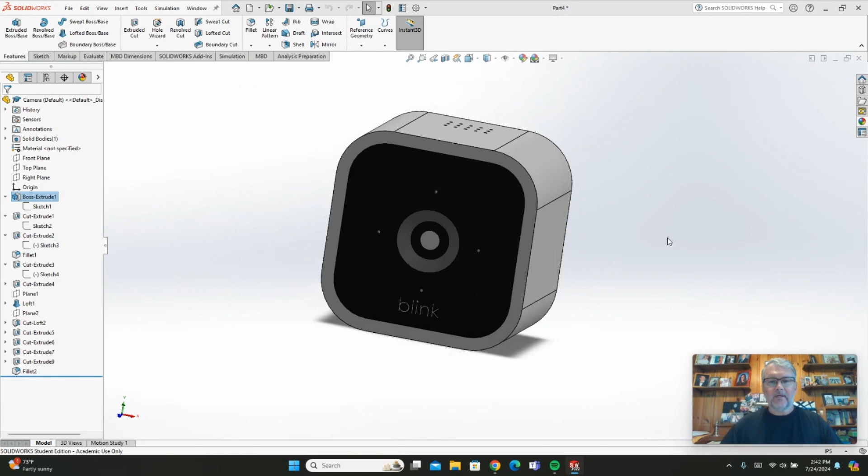I'm going to go up and say new, pick part, hit OK. If you remember in the last video when I did the base, I picked the front plane. I'm going to do that again here, since my base was this way, kind of looking straight on, and I'm going to do the same thing with the camera. I want to look straight onto the camera. The other thing I'm going to do is make my origin the very center of that camera, where that circle was in the very middle, where the actual camera is.

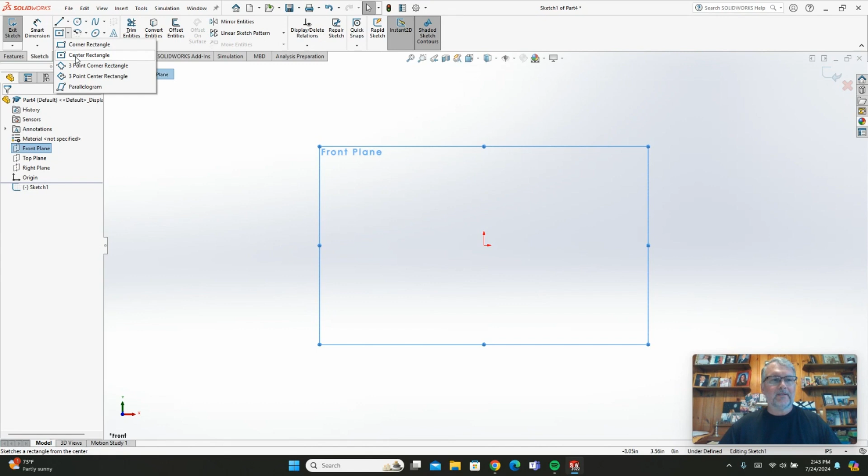So we did have a square camera, so I'm going to hit the rectangle command, and I'm just going to throw a rectangle up here. Then I'm going to go back and dimension it. I just happen to know that it's 2 inches by 2 inches.

Let me get out of this. I also know that it is, I believe, 1.25 deep.

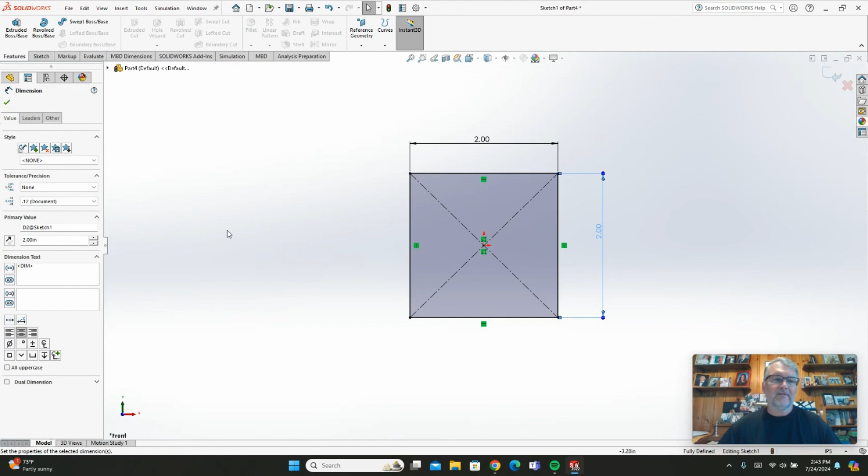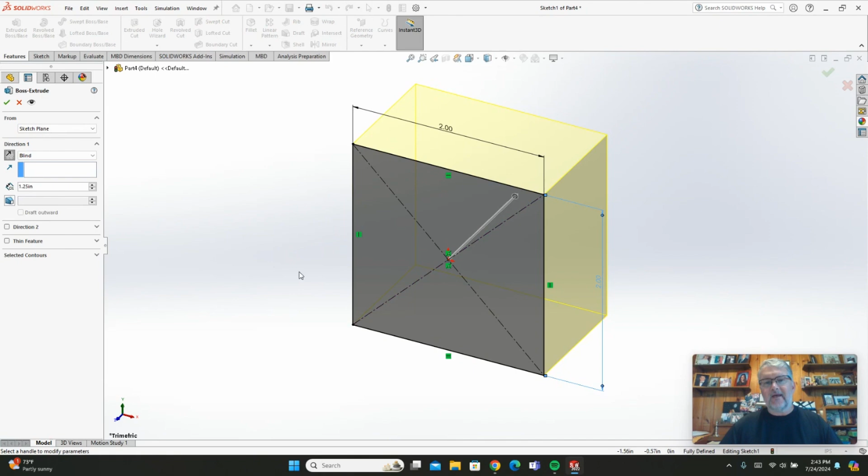So I'm going to go to Features and Extrude. Look at how it started to extrude toward me. I want it to extrude back because I want that origin on my front face, not on the back. So I'm going to change it to 1.25. If that's wrong, I can go back and change it, and then I want to reverse it. This is the button right here, you click, and it throws it back. Now you can see my origin is on that front plane, and that's where I want it. I'm going to hit OK.

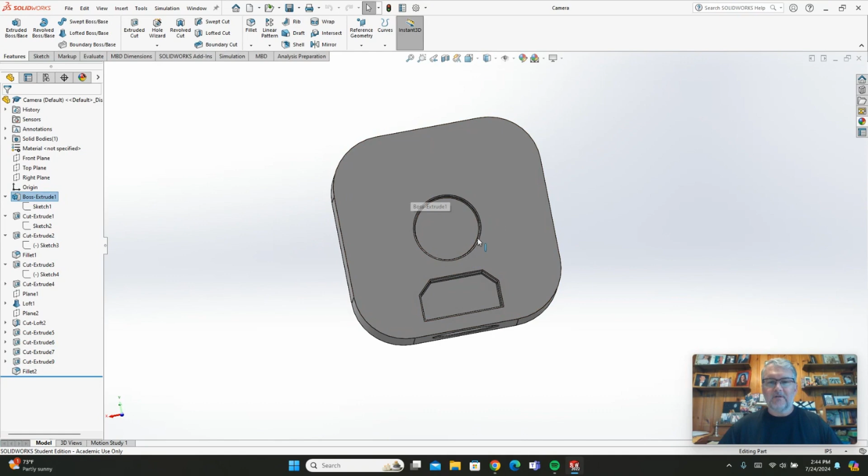So there's my basic block, right? That's kind of what it looks like. Now, if I go back, I'm going to keep referring back to this so you can see what we're doing. On the back of it, I have a circle here, which is a snap for the base if I want to use that. I have one on the bottom, and then I also have this cutout, which is where the plug goes.

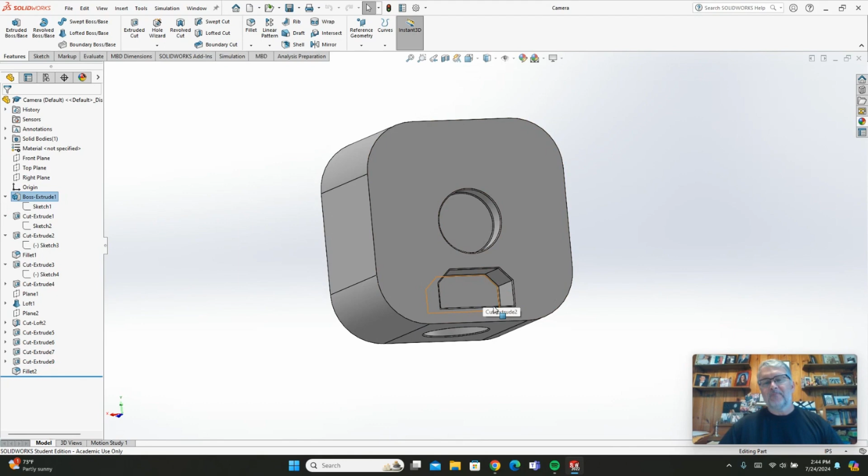Now, I could get into a lot more detail here, but I didn't. I just did a basic plug. You can't even see where the little USB thing goes. We don't need that, not for this video. We don't need that much detail. But what I'm going to do is create these three shapes and those radii on the side.

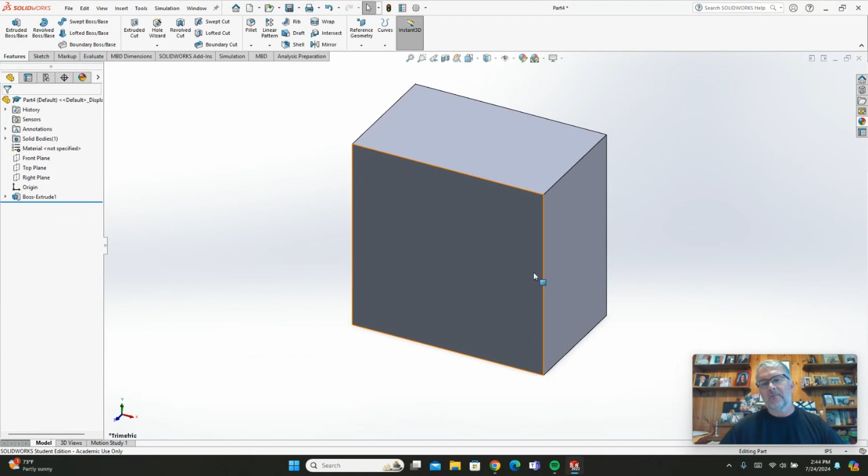So I'm going to go back. The nice thing is, if you have more than one drawing open, you can just go over your icon and click on the one you want. So I know this is my front face, so I'm going to go to the back face. I'm going to click on it, and I'm going to click Sketch. I know that hole happens to be right in the middle, so I'm just going to pick Circle.

I happen to know that it's a 5/8 diameter, so I'm just going to go 0.625. What you can also do, if you know the fractional, 0.625 is 5/8. So if I just go 5/8, the fractional piece, it's the same thing. If you don't know the decimal equivalent of a fraction, you can just use the fraction. That's kind of a neat feature.

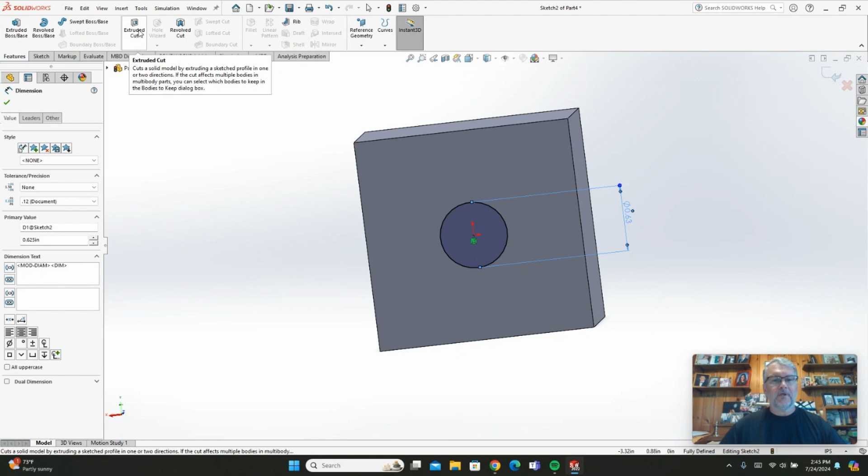Now I'm going to do a quick extrusion of that, but instead of doing an extrude boss, I'm going to do an extrude cut because I'm cutting that piece out. It puts 1.25 in there because that was the last one that we used. I happen to know that it's actually 1/8 or 0.125. It shows me what it will be. I'm going to hit OK, and there's my cutout.

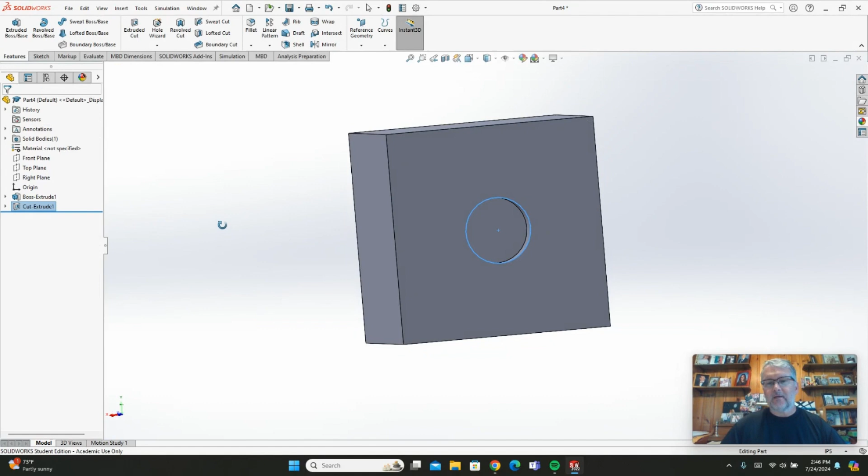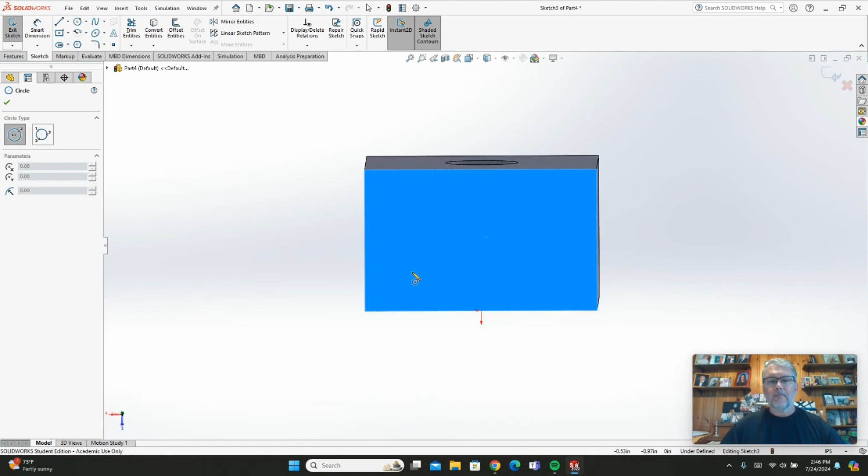Fairly easy. I'm going to do that bottom one too. Again, I can just go Sketch. Now this one's a little bit trickier because I know that my center point is right here because that's my origin. So I can pick my circle, and I'm going to square that up a bit. I'm going to pick my circle. I think I already did. You can see the circle tool, and when I go up, you see that dotted line.

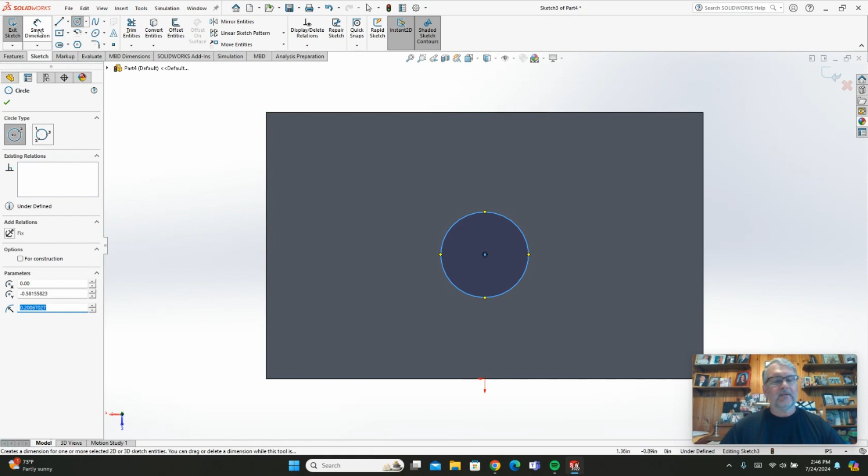Now, it doesn't really tell me where the center piece is, but it doesn't matter. I'm just going to put it here. I know I'm in the center this way, and I'm going to dimension it. It is the same dimension, it's 5/8, 0.625. And I'm also going to throw another dimension. I want it right in the middle from there to there.

If that's 1.25, I can go half of 1.25, which is 0.625. And that will put it in the middle of that block. I've already lined it up with this. I could put a dimension here too, just to make sure, but I'm not going to worry about that for right now. I'm going to go to Features and do another extruded cut.

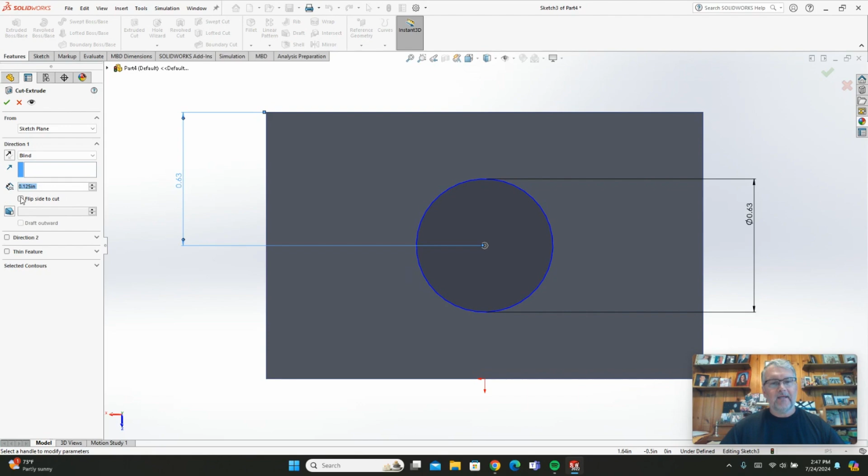It keeps the same value that I had in there before. I'm going to turn that sideways. You can kind of see it. I'm going to hit OK, and there's my second one. Okay, so there's those two.

Now I have the cut. I'm going to line this up. I have the cut that's going to go right here. All right, that cut I know has a certain shape. I'm just going to put that shape in, but I'm going to do it a little bit differently.

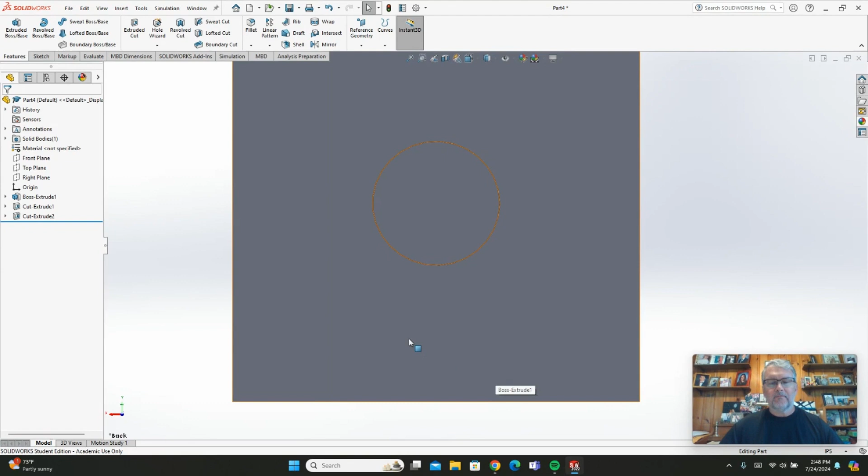What I'm going to do is pick this surface, which is what I'm going to sketch on. Now notice I could go up to the top and pick Sketch, but I'm also given the option here that says Edit Sketch. This should be New Sketch. There you go, Sketch, and it brings up my sketch window. So two different ways: you click on the surface and click Sketch there, or you can come up here and hit Sketch. Either way, doesn't matter.

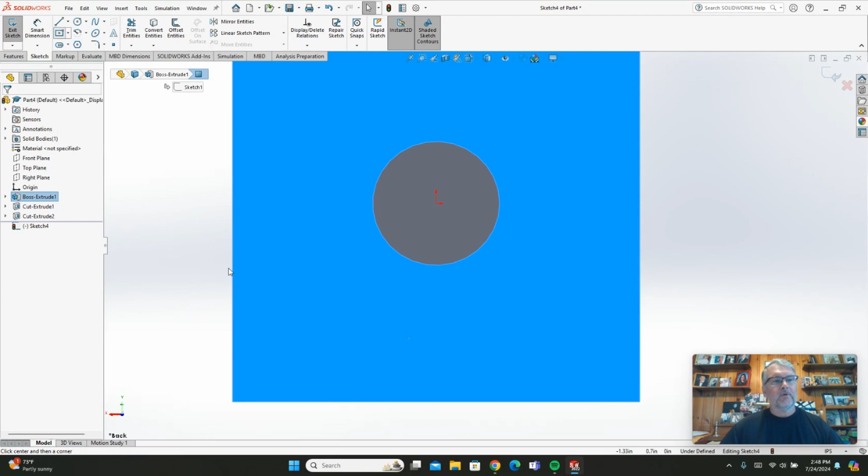All right, so that shape, I'm going to use the center piece again. I know it's in the middle. So, okay, I'm going to do something like that. I also know that it has those little 45 degree cuts on it. So I'm going to zoom in a little bit.

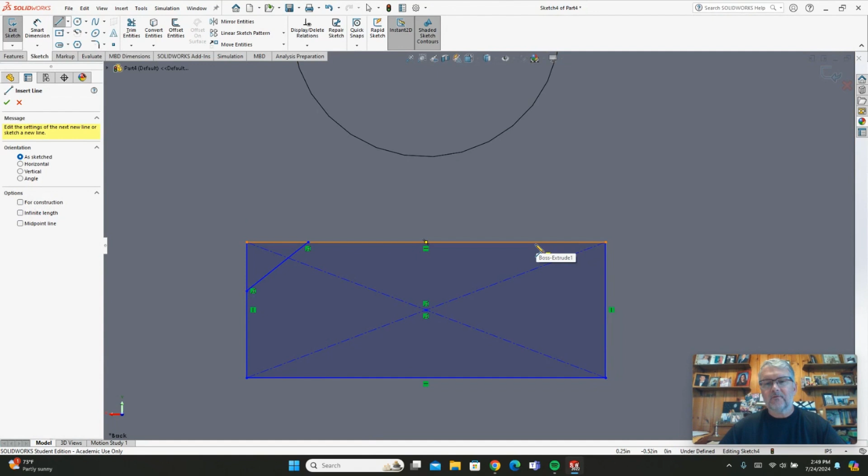I'm going to use my line tool, just create a couple of lines on the sides. Okay, now I'm going to go dimension it. Again, I happen to know from here to here it's 0.125, or 1/8. Same thing between here and here, 0.125. Oh, there might be one thing that I'm missing here.

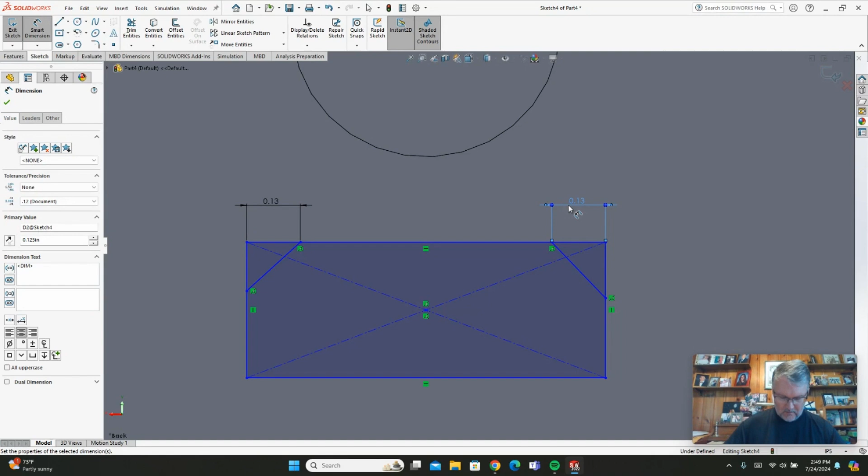I didn't dimension the overall box. I took pictures when I did it, so let me take a peek. Yeah, so this overall here is actually 0.75. Okay, and I also know, well, I'll do that in a minute. So my height, I should also put my height in there. My height is 3/8, or, well, it's 0.375. I'll go 3/8.

I want this at 45 degrees, so I can pick those two lines, 45 degrees. Now, since I secured this point with that dimension, it just moves this line to meet that 45 degree mark, which is a pretty easy way to do it. Once you get a particular point in line, you can use it. You get in trouble that way too, but you can use it for other dimensions.

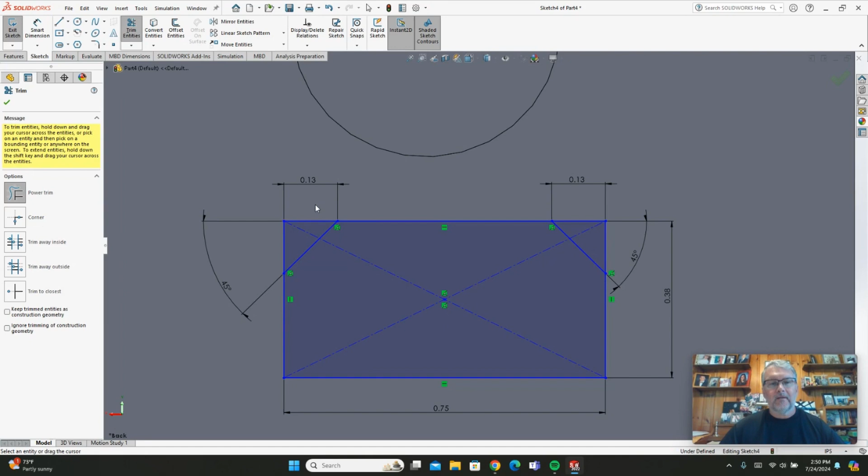All right, now I want to use that trim entity. I'm going to use the power trim, and now I'm going to get rid of everything that I don't want. I'm going to hold the left button down and just drag it over the lines I don't want. I don't want any of these ones in the middle either. And in the end, there's my box.

Okay, I do want it—now I've already centered it, so I know it's in the middle, but I do want a dimension from here to here. I believe, let me make sure I know what that is. I think it was 3/16. Nope, it was 0.125, so it was 1/8, 0.125. Okay, and that is where that is going, so I've created that shape, just created a box, and cut it away the way I want it.

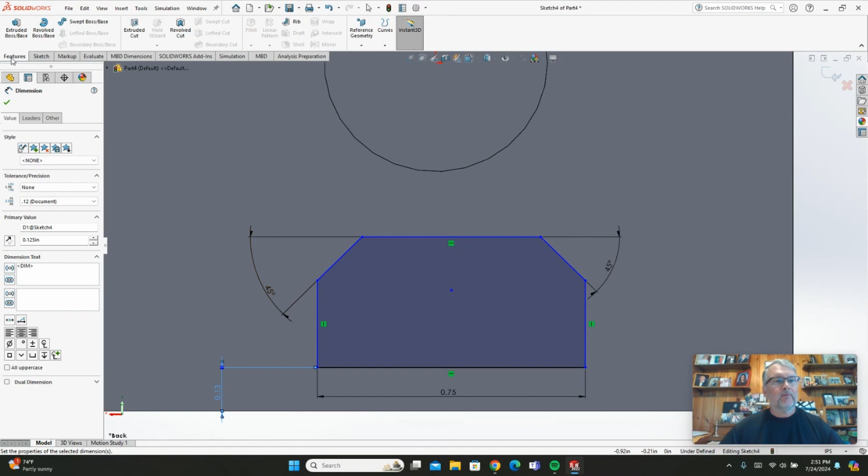Now I'm going to go to Features, I'm going to do another extruded cut. I believe that is 0.25 deep, and again, if it's not 0.25 deep, I can go change it later. I'm going to hit OK, and there's that box.

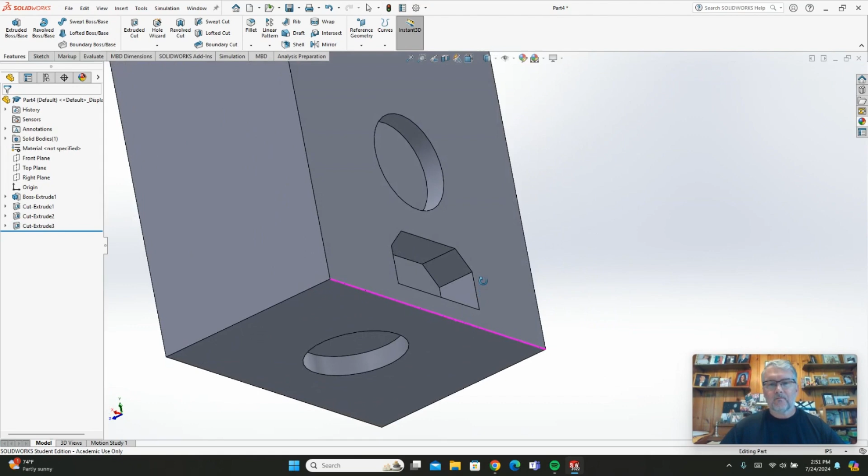All right, so that's where my plug goes. Again, I could have put a dimension in there to make sure it stays on center. Okay, you can. It's up to you.

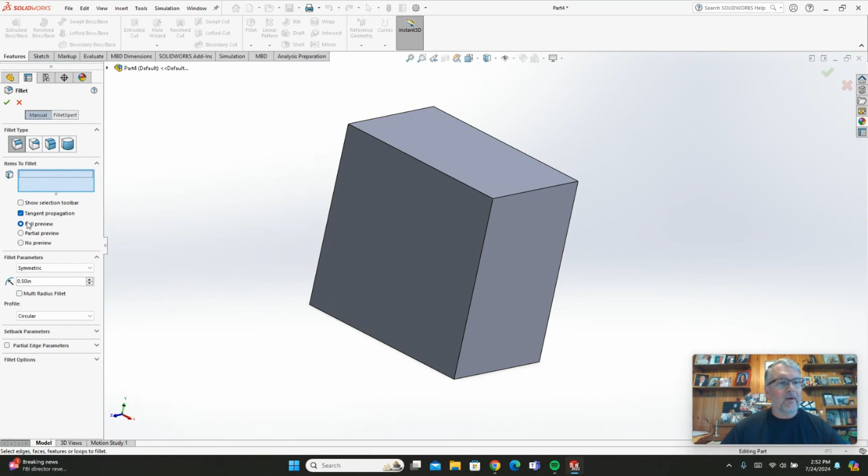Now, one thing I want to do is round these corners. I mentioned before I like doing it in the fillet command. I know that I believe it's a 0.5. I can change it if I have to, and you want to make sure you have that full preview on. I'm going to click each corner. It's going to look nice.

I could have also, when I drew this, put circles in here the right way, but this is, I think, a quicker way to do it. And then there's my radii.

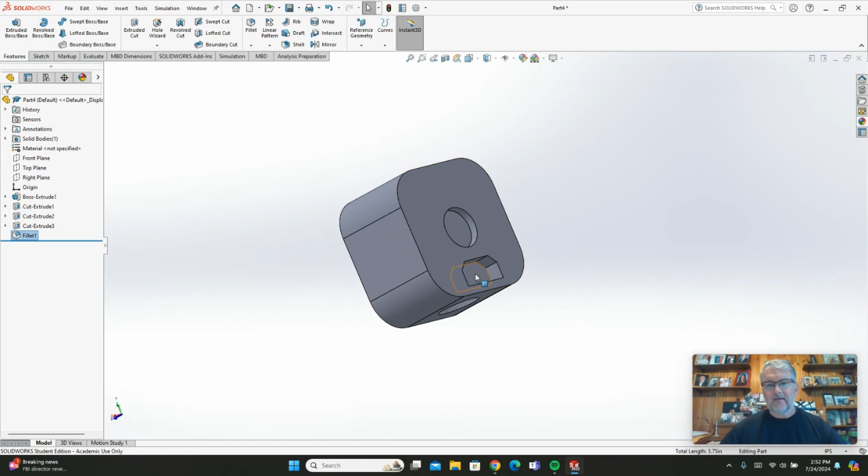So I have this in the back, I have that where my plug goes, and I have another mounting point from the bottom. One thing I want to make sure I do, just because it makes it look nice—if I go here, look at where I have the fillets, there's nothing in the front, but all these back pieces back here are all rounded slightly. It's always good to have those.

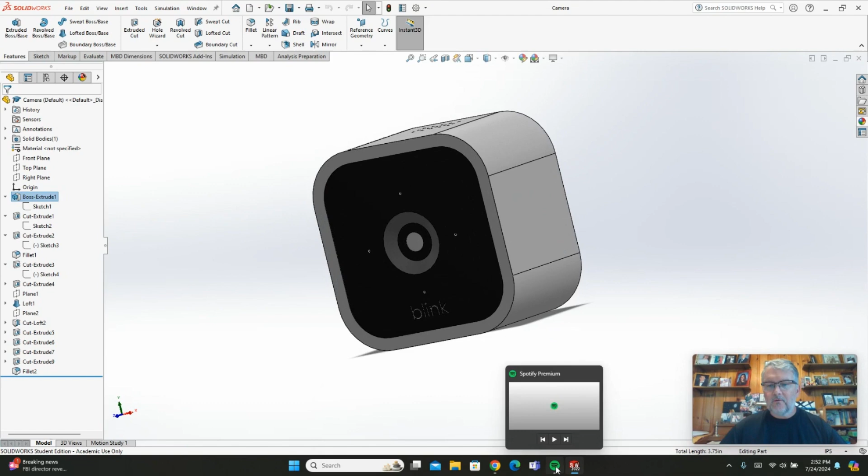So I'm going to go back to that piece, and I'm just going to add all those fillets. And I'm going to go 0.02. I think that's what I used before. You can zoom in on that and just lay those in.

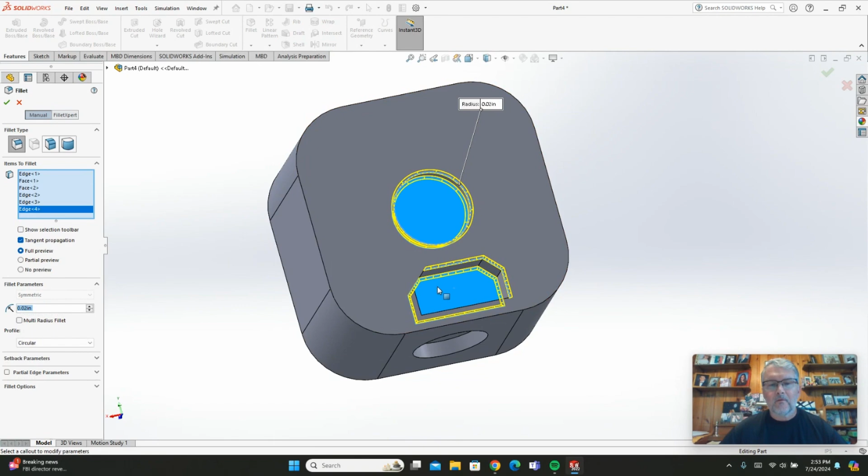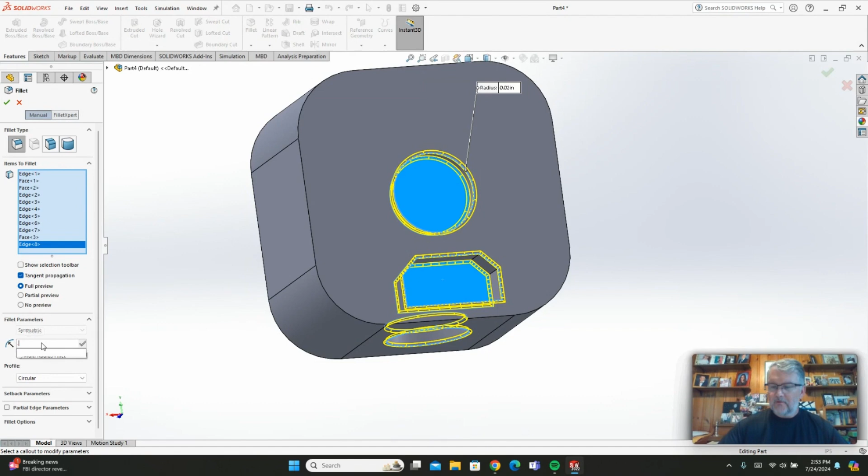Might make those a tad bit smaller. Okay, I'm going to make them a little bit smaller. I'm going to make it, oops, 0.015. Not that big of a difference, but it is. Alright, that just makes it look a little nicer.

And again, I can go up here if I want a real good look at it, and you can see everything is nice and smooth.

Okay, this is step one for the camera. Like I said, there's going to be 3 different videos to get this camera piece done. This is the first one. This is the end of camera video number 1. On to video number 2 for the camera.